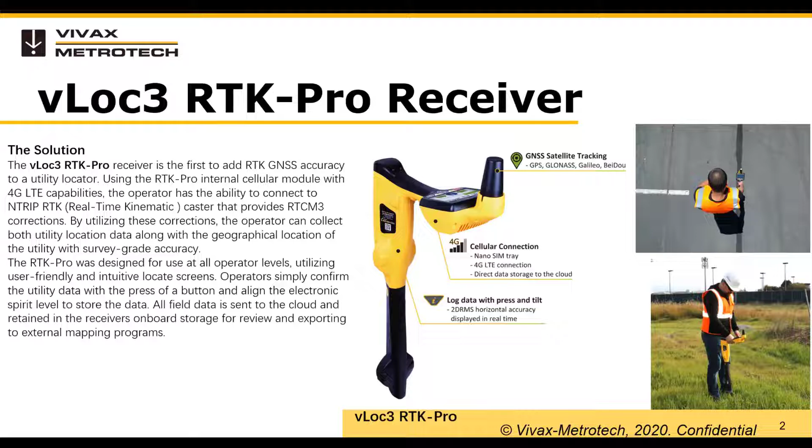You see a vertical view and another screenshot there. I'll just take you over to this. So our overview is that we collect from multiple satellite constellations with the RTK receiver and base stations. The base station will generate correction data for the RTK calculations and send this via the 4G cell phone network to receive corrections across the network, to give you in real time plus or minus 1 inch.

And these base stations are operated, as I previously said, by some states, some DOTs, and some free services like RTK2go, and also there are ones that you pay for, like Topcon, Leica has one, and also Trimble.

So when you're actually collecting the data, this is a screenshot of our unit. It's just a traditional locate screen. So if you are a locate technician, you can collect real-time GPS data in survey grade. It's not intrusive to the everyday locator. It's not too much information. It truly is a very simple click and collect idea.

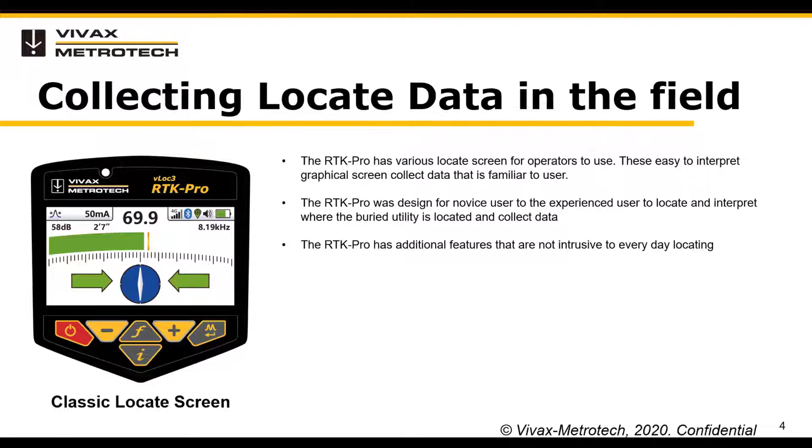So storing a point, the locating technician drives everything when they're trying to store where the underground utility is. They've already nominated which utility type it is they're locating, be it gas, electric, power, cable TV; all of those options are in the unit. You select a new survey, then you select the utility that you want to locate, and then you go along and do your traditional locate methods of proving the utility you want to locate.

With a very simple button press, you align the bubbles; you'll see there's a small white bubble in a larger green bubble on the right-hand side of the screen. You are vertically aligning your GPS antenna with the bottom of the utility locator, which is the exact position of that utility you want to collect. And once it's within 1 degree of accuracy, it'll record it, snap the information, send it to the cloud, and send you back directly to the normal locate screen.

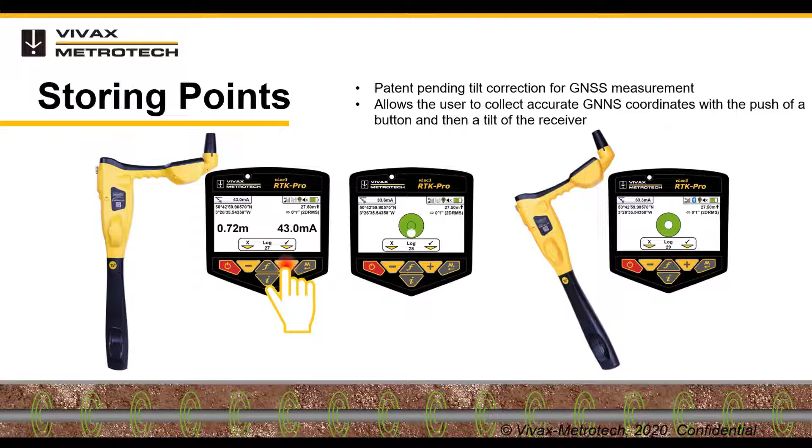So here's a video of an old locate guy some people may recognize, actually storing and taking points.

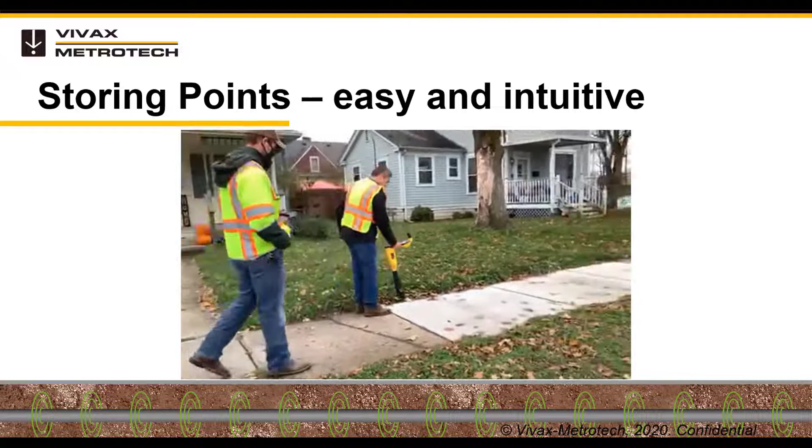And the reason why I'm stepping back 1 or 2 paces: the GPS, we've got it set on the screen of the regular locate portion. It will actually count up in inches. So we wanted to map out every 15 feet. You actually get plus or minus 1 inch accuracy with the antenna. So therefore you can do exactly 15 feet or whatever distance the contractor or utility says you must do, whatever the best practice is.

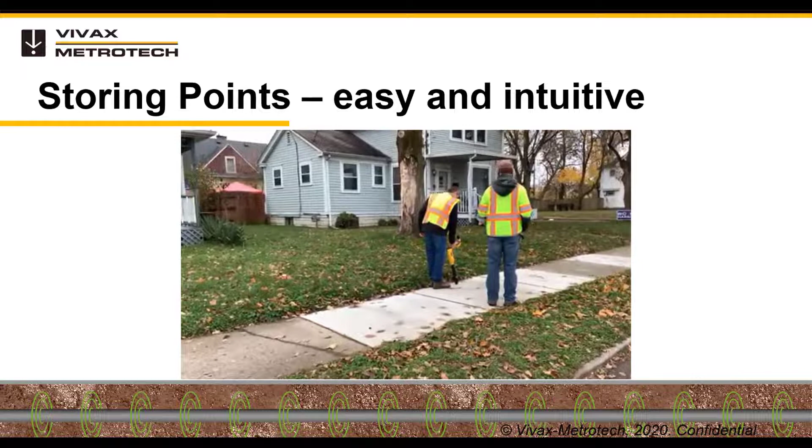So with that being said, with locating, it's very important to know what you're doing. Some of the features on this device: if you swing the locator too much, not only are you wasting energy, but you're not using the equipment correctly. So we have a very small vibration motor in the handle, and it actually vibrates to tell you, hey, you're swinging this unit too much. Don't want to mismark. Want to avoid a damage.

If you're also too close to, for example, a grid around a power transformer, or too close to the transmitter, an overload indication will come up to tell you you're too close to obstructive signals, and therefore you won't be able to take an accurate locate position with that locator. So it warns you with that. If you have a lot of interference from overhead power lines, high tension lines, especially in the summer, if that does become a problem, it will give you that indication as well.

And there's one last one that you'll see. If there's shallow depth, anything 6 inches or less, it'll give you an indication there as well. You can still record the data. It's just asking you the question, is that the utility that you are locating?

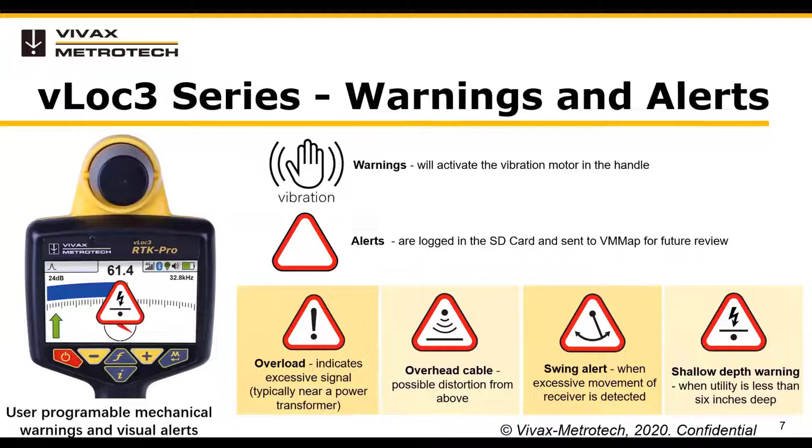Also, there's several different modes available on this unit. We use a color bar graph and a color screen to indicate the quality of the locate signal. It enables the technician to make the determination: one, is this signal good enough, and two, am I on the right facility?

So we have an offset mode. It's fully automatic, and it's the only unit that'll let you take an offset reading that will give you depth of cover and laterally your distance from that utility. And it'll also show you in real time the quality of that signal, and it changes color according to the quality of that locate tone.

There's also a transverse graph mode, which some people like, and also the plan view mode. In all of these three modes, and also the classic mode, we always display the depth of cover and the current of the signal you're detecting, which is very important when you want to determine, is this my utility I wish to locate on.

So talking of a color display, if our information is green, it means you have a very, very clean signal. Distortion levels are very low. If it's blue, it means you have some distortion. That can be the real world. This indeed does happen. And if it's red, it means you have a high level of uncertainty.

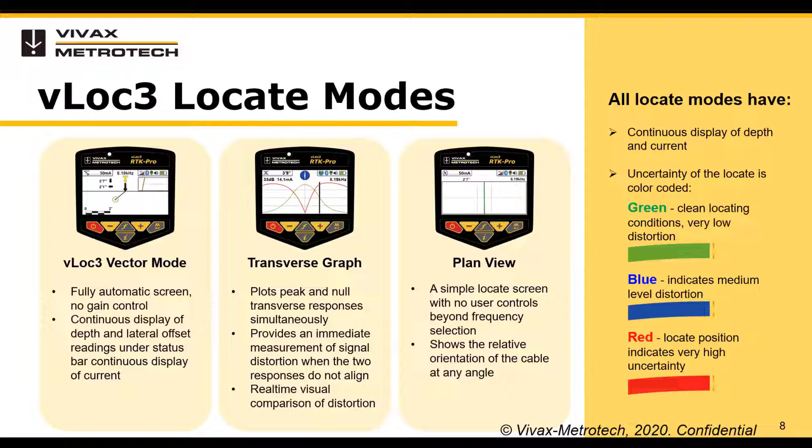And all of that information is captured when you take a GPS point and sent directly to the cloud. So it gives some very important feedback and makes it intuitive for the operator to see, to make sure they're making the right decision when they capture that point.

So there's some other discussions people have gone on about, and say, hey, I want to be able to go back to a previously recorded point. And you can do that. So in this unit, as long as it's designated in the cloud that those coordinates are a point you want to walk back to, next day, next year, six months' time, to confirm you are going back to exactly the same position as you did prior, you can send that information over the cloud. You don't need to be in the office to get it.

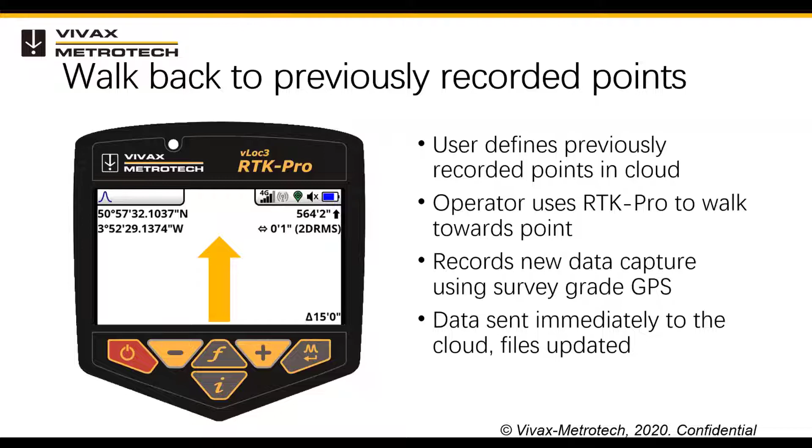You pull it to the job site, turn on your unit, go into the sub menu, ask for it to collect your nearest walk back points, and you'll notice in the bottom right corner here of the screen it'll say 15 feet, and it tells me I need to walk directly north, hence the large yellow arrow. And as you get closer, it counts down its footage. Once you get within 10 feet, the red cross is where those GPS coordinates are.

So all you do, you just put that red cross in the middle of that green bubble, press the plus key, and it sends it up to the cloud in real time. And in the office, you can see that you've just confirmed that that technician is at that point that you've designated.

Now that could be a previously recorded point to say, I want to make sure that the operator is connecting their transmitter at this gas meter, for example. Something like that. It can be a stationary point as well. So that's one option, and being in the cloud, it's updated immediately.

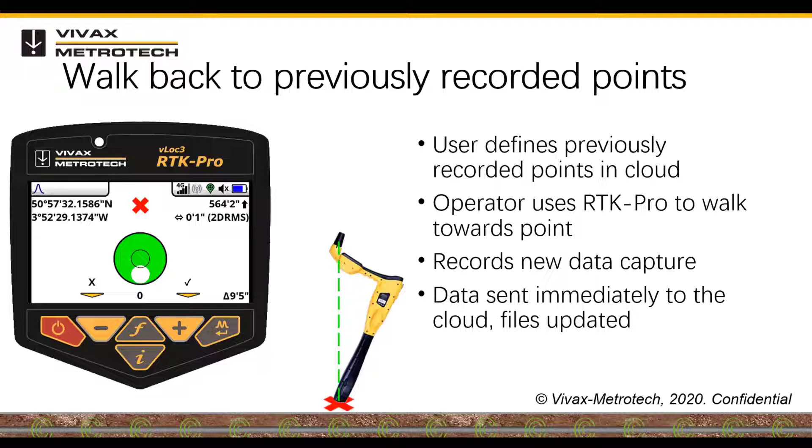Also, logging of attributes, obviously something that we know many people are looking at. There's a feature set in the unit where you can define above ground attributes, each differently depending on the utility that you're locating. Obviously, power has different designated attributes than gas, for example. Here's just a screenshot of gas. So you can go into that. This is customizable as well.

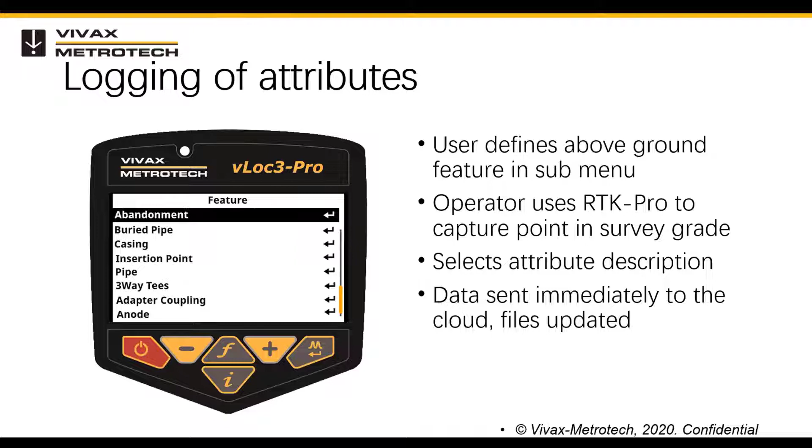Put in your list, go out into the field, and you can take in survey grade GPS, plus or minus 1 inch. You can select an attribute description, for example, a gas meter here, log that point, it sends it to the cloud, and it's designated as being a gas meter at these coordinates, and it's all done in real time. And if you wish that to be a walkback point in the future, you just designate it in the cloud as a walkback point.

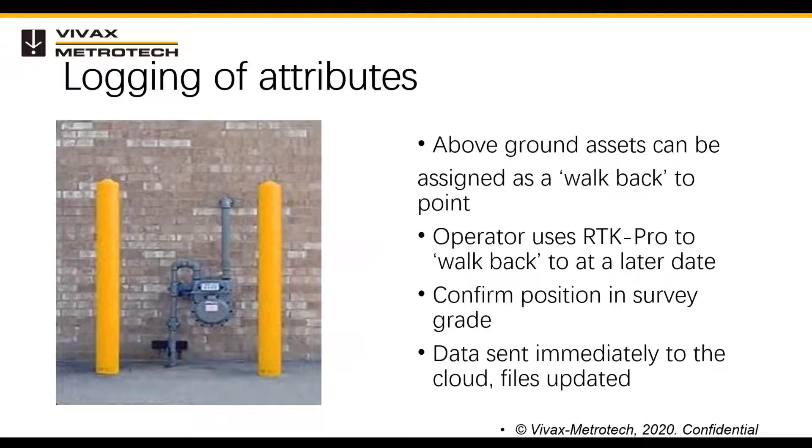So we have VMMap, an Android and iOS app that you can use on a cell phone. That also gets sent to the cloud as well. It's just not as accurate as the RTK Pro, which is giving you your survey grade due to the corrections and the antenna chipset in the unit.

So with the cloud management data, it goes into our VMMap web portal for secure data transfer. You can view it in real time. You can do a locate, and within 2 minutes it's in the cloud, sometimes less than that. You can export various file types because everybody's on different platforms with their maps, etc.

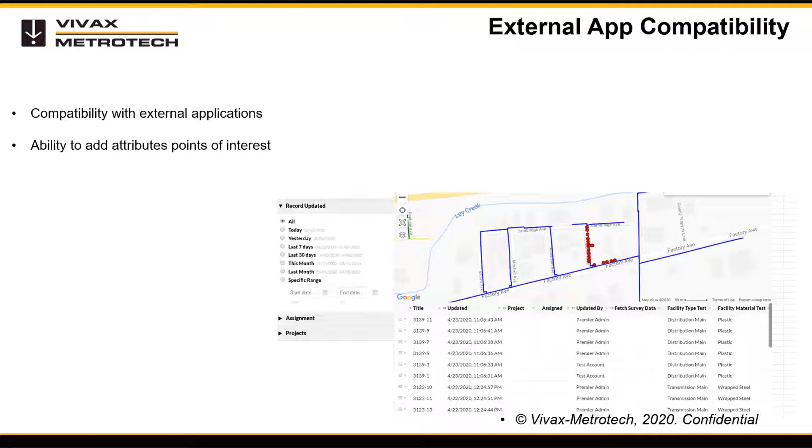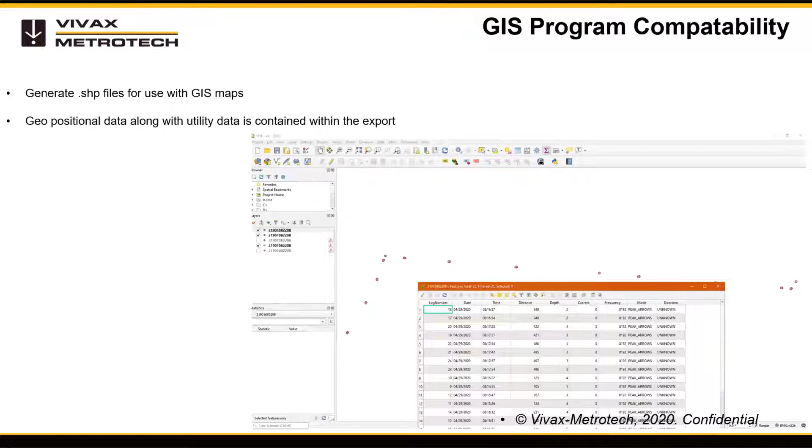So in regards to Esri and shapefiles, fully exportable, fully expanded, and we have people that use that today. So that was really just the overview of the product that we have, and the ability of a locator. It's got all the full features of locate equipment, plus it has this internal antenna that enables giving you survey grade GPS in real time.

Are there any particular questions? I didn't want to use up too much time, but... We're good on time, folks. So please go ahead and ask questions as you see fit. Well, I just wanted to do a little commercial. I was wondering when you were going to do this, Barb.